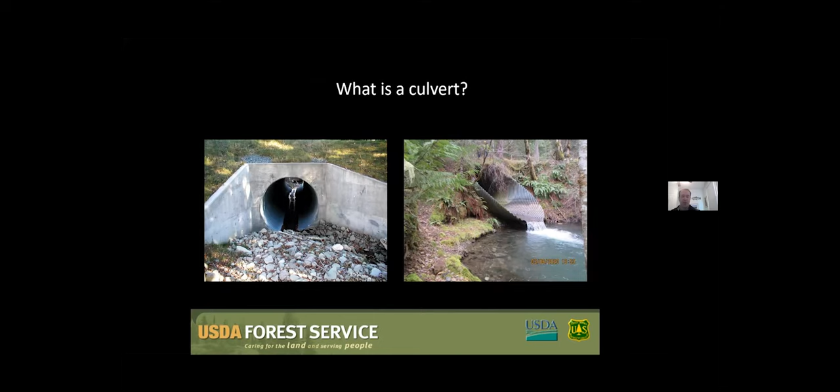So what is a culvert? It's a pipe. A culvert is a barrel or a conduit. It is a type of road crossing that transports water underneath the road.

Culverts come in all shapes and sizes. Road crossings and culverts can be small and inexpensive, or they can be large, very complicated and expensive. They can be rectangular, oval, or pretty much any shape.

But what's important to know about road crossings and culverts is that typically they use a hydraulic design. This means they are built to transport water through the road stream crossing. They are not designed for fish passage, and they're not designed to move sediment from upstream at various water levels.

We know that streams are dynamic, constantly moving sediment down from the mountains to the ocean. What you can see here is a culvert on the left with a hydraulic design; when it was installed, it provided fish passage. But because most hydraulic designs squeeze water through the pipe, the force of the water causes erosion, and over time they become fish barriers. So less than 20 years later, we have a very large fish passage barrier.

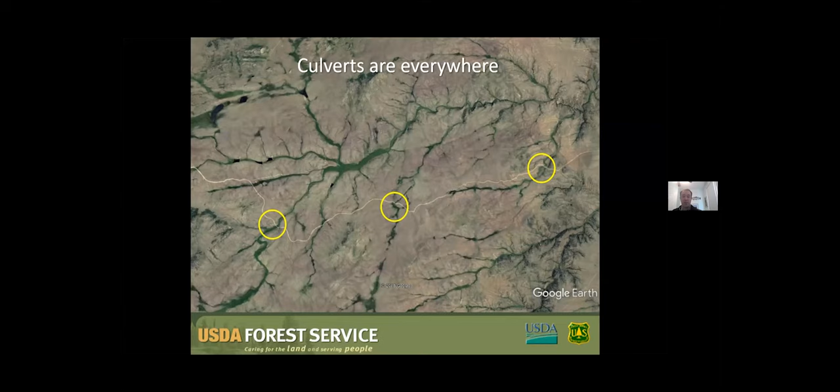Now we know these culverts are most likely fish passage barriers, just based on the thousands of culverts we've inventoried across the United States. We've found that between 50 and 90% of all hydraulic design culverts are barriers to fish. So these 3 streams here in this desert environment are most likely biologically disconnected from the main river.

Being so common, culverts have major ecological impacts. We know that fish need to access all kinds of different habitats for their life cycles. Here, the Chinook salmon makes spectacular migrations of hundreds of miles to find the cold water and clean gravel they need to spawn, to lay their eggs and die—but can find a culvert and be stopped in their tracks.

Fish are remarkable in what they can navigate. This eastern brook trout is fine in very shallow water; it can easily climb cascades and waterfalls. But when it comes to culverts, they often have very low water depth, and so a fish like the brook trout may not be able to move through a culvert because of the low water depths inside.

Pacific lamprey have trouble navigating high water velocity, and this is particularly a problem inside culverts where we have a smooth bottom. So these fish that have been migrating successfully for hundreds of millions of years now do not have access to most of their habitat because of dams, weirs, and culverts.

Most fish, like this incredibly colored Tennessee darter, do not jump. So when a culvert creates an artificial waterfall or perch, most fish are not able to move up through it. How can they complete their life cycle? In summary, culverts disconnect rivers and streams. They're either too shallow for fish to swim upstream, the velocities are too fast inside the culvert to navigate, or they create this artificial waterfall or perch. And remember, most fish can't jump.

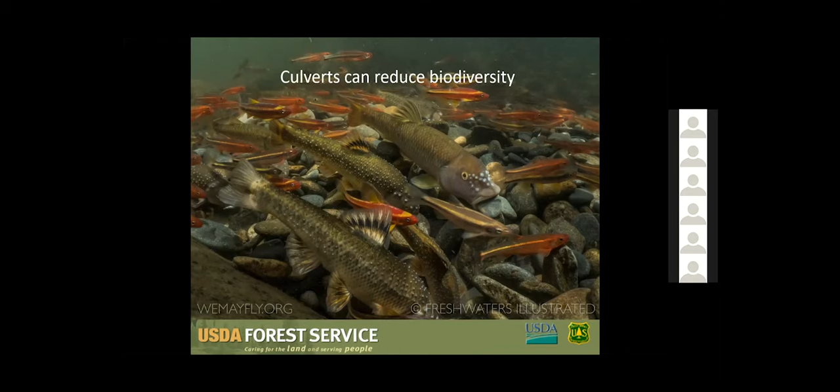The bottom line is that the cumulative impacts of culverts can greatly reduce aquatic biodiversity through fragmentation. Our research has shown that when culverts act as road dams and limit the upstream movement of aquatic organisms, these streams have lower aquatic biodiversity, lower genetic diversity, and smaller sized fish.

Of course, culverts impact more than fish. Here we have the largest salamander in North America, the hellbender, wrestling with a water snake. And culverts impact terrestrial animals as well that use these headwaters.

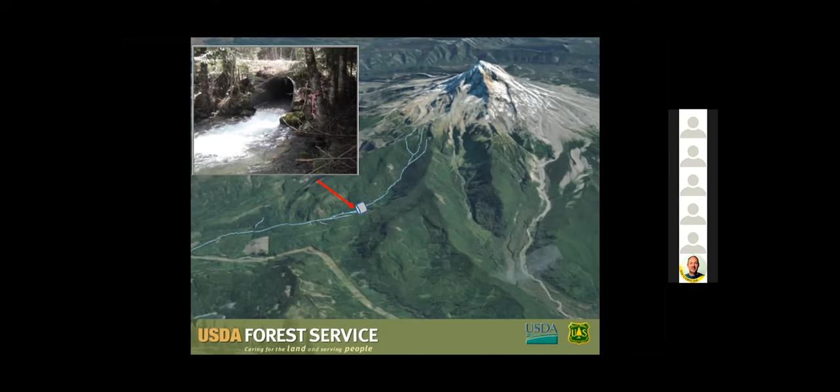Let's think about climate change for a moment. You can see the glacier of Mount Hood in Oregon and the stream flowing off that glacier. This is the picture of the culvert that was a barrier, which the Forest Service and partners replaced with a simple bridge and natural stream bottom. Now the salmon and steelhead can access this important habitat as waters warm and the climate changes.

But improperly designed culverts also impact us. They impact communities. When culverts are too small in their hydraulic design, they're often overwhelmed during large flood events, and the results can be catastrophic. When culverts fail, they create not only safety hazards, but they disconnect communities from where they need to go, sometimes for weeks and even months.

When we're talking about climate change, the culvert network that we have makes us increasingly vulnerable to its impacts. The research we've been working on with our colleagues shows a very strong link between fish passage and the ability of a culvert to withstand debris and heavy flood flows with climate change.

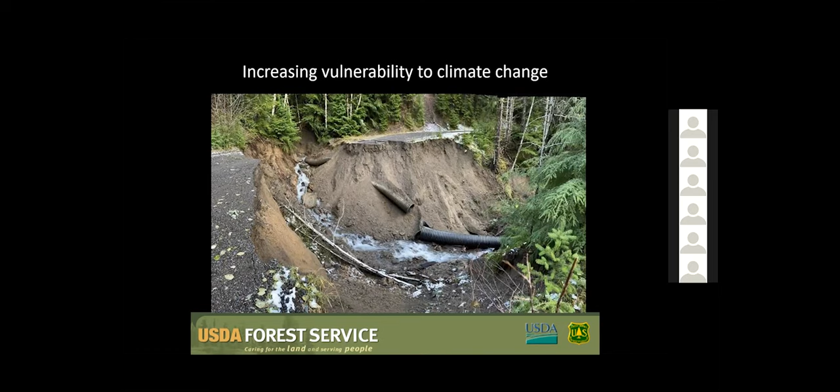But fortunately, we have solutions, and that's what you're going to hear about today. So that's the good news. We can find a place where we have fish passage. We can make the culverts and the road network safe for people and communities, and we can start to deal with the climate change that sits in front of us. I'll end here summarizing that you're going to learn about some concepts, methodologies, and strategies to deal with the problems of culverts, but luckily you'll see there's a brighter future ahead. Thank you.

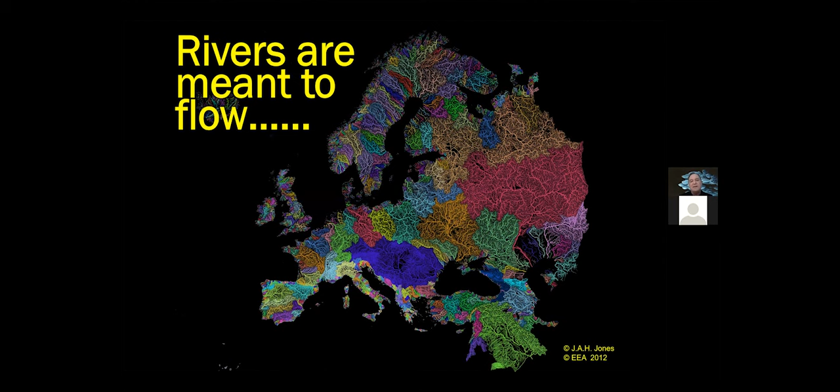We call them running waters. Unfortunately, in Europe, like in many places around the world, that's no longer the case. Most rivers nowadays just don't flow, at least they don't free flow. And of course, that is a problem because, as you know, they're some of the most endangered ecosystems on Earth, and ensuring continuity is key for their survival.

So you will be forgiven for thinking that it is the big dams which are the cause for this fragmentation, but that's not actually our biggest problem. It is certainly not the only problem, and in many cases, it's not the biggest one at all. The big problem we face in terms of fragmentation are what I would call the nasty six, and that reminds ourselves about the use we make of rivers.

We use rivers for generating electricity, but also for drinking, and we build dams to do that. We drain rivers when they are not convenient, to grow crops sometimes or to plant trees. We divert rivers so they can be used for irrigation. We tame rivers when they pose a flood hazard. We bury rivers when they stink and they are no longer nice, but we also cross rivers. And this is the one we are going to talk about now: the structures that we build in order to cross rivers, and those are fords and culverts. I'm going to concentrate on culverts.

Okay, so I think Nat has summarized very nicely what a culvert is, but let's just remind ourselves that of those nasty six, three are so-called ponding structures. Those are structures that are going to store water, okay? And those are weirs, sluice gates, and dams. The other three have nothing to do with storing water. We call them non-ponding barriers, and those include ramps and bed sills, but also culverts and fords.

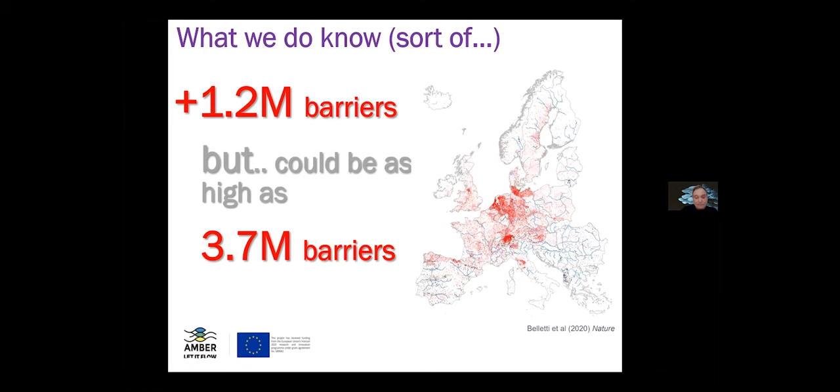So how many of these are culverts? Well, one thing we do know is that of all the structures that we have mapped, structures like culverts and fords and river road crossings are the ones that have the highest underreporting error. Those are the structures which are more likely to be missed in inventories, the ones for which our estimates are more of an underestimate. In the atlas that we built, that we compiled, we identified across the whole of Europe just over 111,000 culverts. But we know that's a big underestimate. It could be much higher than that.

So we know that because now, thanks to volunteers all over Europe and also increasingly in other parts of the world, they are starting to use our barrier tracker, an app that anybody can use to start recording and identifying these barriers. We know that volunteer citizens are telling us culverts are everywhere. They have recorded, as of data from a couple of days ago, just under 12,000 barriers, 16% of which are culverts. In some countries, like Denmark, people are telling us over 45% of the barriers they are discovering are culverts. In Norway, it's also over 40%, in Ireland, everywhere. Culverts are everywhere. Now, the problem with this, of course, is that this data is extremely useful, but it has not been collected systematically. We don't know how far or for how long volunteers were out there detecting barriers. So this data is very useful, but we need additional data in order to come up with more sensible estimates.

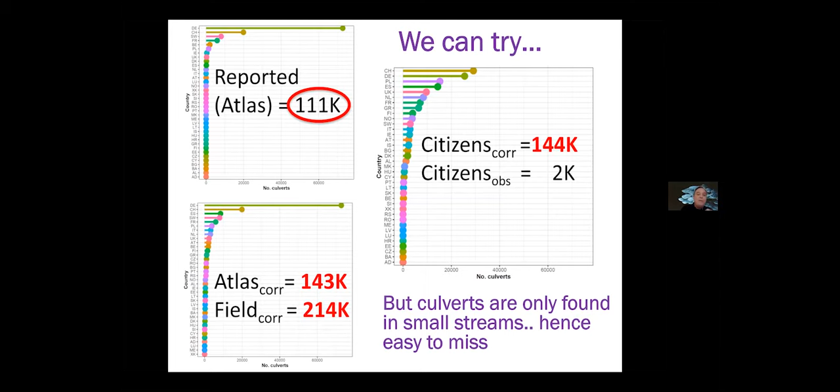But we have tried. And if you remember, in the atlas there were just over 111,000 culverts. When we apply these correction factors, we come up with estimates like 214,000 or 143,000, depending on which correction factors one applies. But of course, this is in a way based on something we know is wrong, based on the assumption that culverts are everywhere. But we know that's not the case. We know they're found mostly in the headwaters.

So what would happen if instead of using these estimates for the whole of Europe, we just concentrated on the headwaters? Well, the total length of the river network in Europe is about 5 million kilometers, 80% of which are first and second order streams. And if we were to use the density of culverts we found in the field, just in first and second order streams, one would come up with an estimate of more like 500,000 culverts. That's more than twice our previous estimate.

Okay, but obviously this is a very rough estimate. Perhaps another way we can tackle this question is by looking at other ways of estimating culvert density. One way that my colleague Barbara, during the AMBER project, did was to look at the density of river crossings. And we found that that was a reasonably good predictor of barrier density.

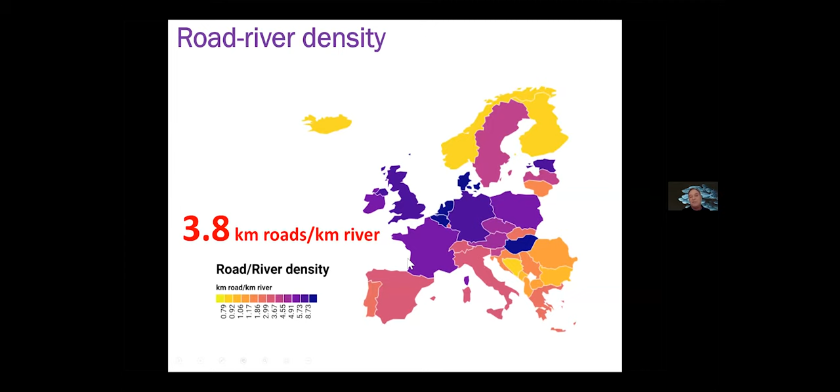Now, Europe has some of the highest densities of roads anywhere in the world. And you may be surprised to discover that for every kilometer of river, there is almost 4 kilometers of roads in Europe. Some places where the rivers are absolutely crisscrossed with roads are Germany, the Netherlands, the UK, and France. Some of these are very, very high estimates.

So if we were to use this method instead of the field method I outlined before, one could reasonably come up with an estimate which is under 1 million culverts. Obviously, this is a very rough estimate. It would imply that places like France may have over 150,000 culverts, Spain 100,000, Sweden 86,000, and so on. So it's a big, big number. Obviously, the uncertainty is high.

Is this a reasonable number? Well, my colleague Steph, who will speak next, has estimated that for Great Britain there may be about 50,000 culverts. We have just estimated that number may actually be 59,000. In the Great Lakes, which is about 20 times smaller than Europe, there are reported to be 250,000 culverts. So it may not be that unreasonable to find this sort of hundreds of thousands number for Europe. Germany has 51,000 bridges, so perhaps 96,000 culverts is not that unreasonable.

And the same for France. France has, nobody knows for sure, but it has between 200,000 and 250,000 bridges, so perhaps 150,000 culverts might also be reasonable. It doesn't really matter what the actual number is, and it will take a lot of work and research to get more precise estimates. But what is clear is that culverts are very numerous.

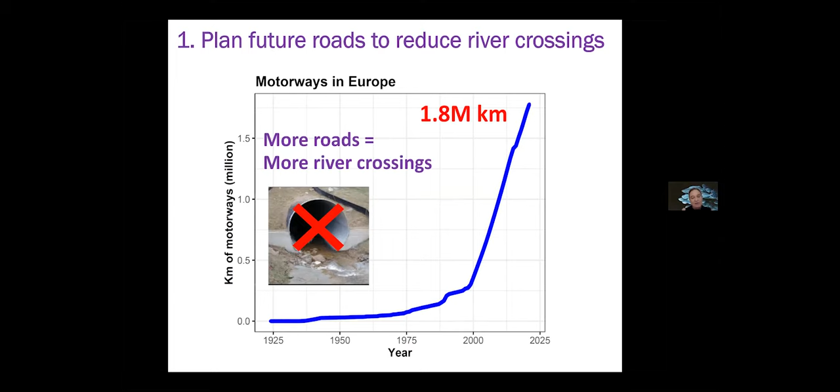We now have almost 2 million kilometers - this is just motorways. And of course, more motorways probably mean more roads, which means more river crossings. So we're never going to win if we continue crisscrossing rivers. The way we can win, that we can reconnect our rivers, is by halting, stopping, fragmenting them, and that perhaps can be done by rethinking how we plan and design roads.

Likewise, the other thing we can do is perhaps start considering how we can decommission abandoned forest tracks, roads which are no longer in use, and how we can apply some sensible rerouting of existing road networks in order to minimize the number of crossings.

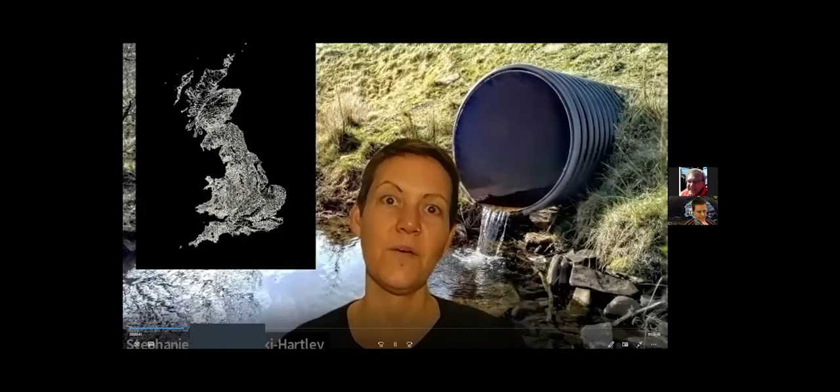Firstly, I use the satellite imagery and the existing spatial data, which are streamlines and the locations of road river crossings we don't know the types for. I then zoom in and along a streamline until I find a road crossing mapped by a yellow pin. Once at the pin, I zoom in as far as I can and visually assess the structures at the location. It is most often a culvert, a bridge, or a ford. Once I identify these structures, I map the corresponding marker, and that's it. I will then continue along the streamline to the next river road crossing.

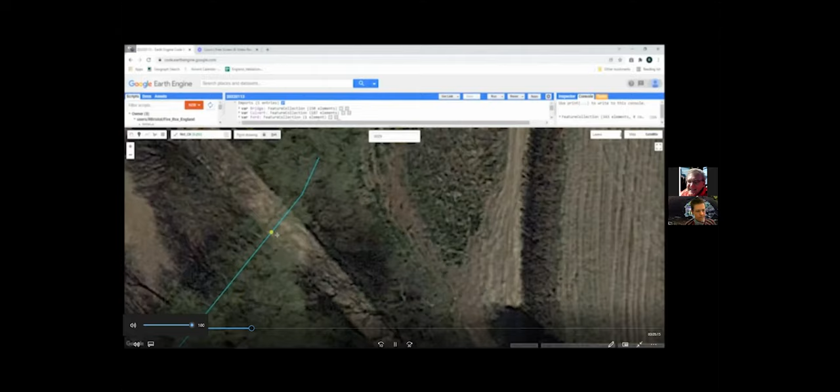Sometimes the imagery is low resolution, or there are trees covering the structures like this one here. In such cases, I use the corresponding marker and map the location as not clear. A second person later visually assesses the location, and we aim to map all structures as a culvert, a bridge, or a ford, not leaving any not-clear points. Eventually, the satellite imagery is full of coloured pins, and we have attributed the road river crossings. This data will be part of a large river obstacles database for the United Kingdom.

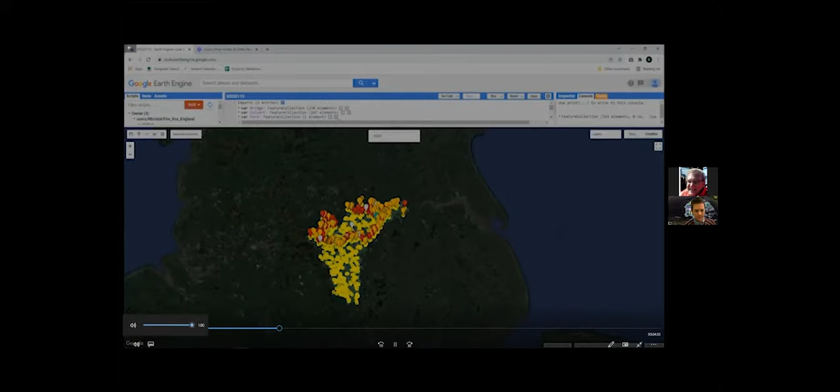Thanks, Rochelle. To date, we've attributed nearly 12,000 road river crossings in Welsh catchments, finding that most are culverts, and you can see those as orange dots on the map.

Culverts on small streams are vulnerable to failure because they're often situated outside built-up areas and in steeper terrain, and the status quo is that these culverts are poorly installed and maintained. But what do these culverts look like in Wales, and what attributes might indicate these structures are impacting nature and possibly people? Well, we're in luck, because today our culvert correspondent Carrie is streamside and ready to get her feet wet.

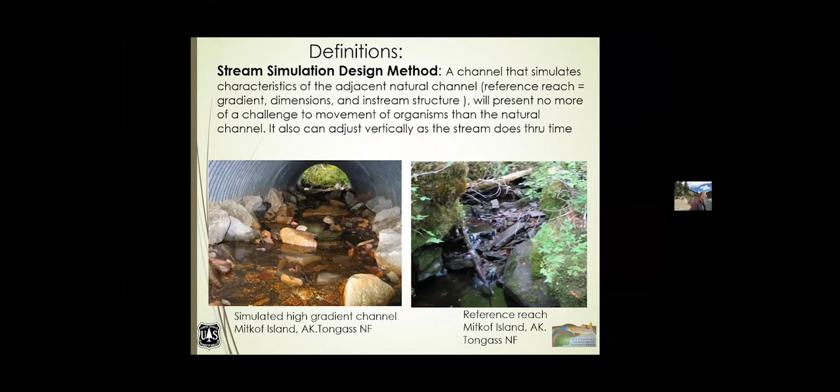The reference reach, that's the principal thing that we're going to be copying. A reference reach can be found in every stream type and geomorphic context. The reference reaches are found either upstream or downstream of the structure, and they provide the channel dimensions, the material sizes, the grade controls, channel units, etc., that are used to configure the channel as a crossing with similar attributes. It is the stream segment that is copied and emulated to develop our design.

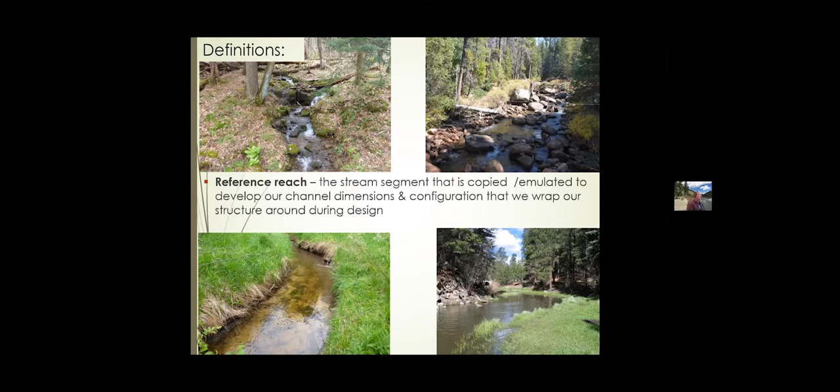So bankfull width, that is a significant width as far as hydrology goes, and it's the width of the location where the channel begins to spill onto the floodplain.

Oops, is that just me or did we lose Bob? I think we lost Bob. Yeah, he was too enthusiastic. We have to find Bob again. Maybe while he gets back in, we can move to the next point. What do you think, Herman? Shall we give him 2 minutes, 1 minute?

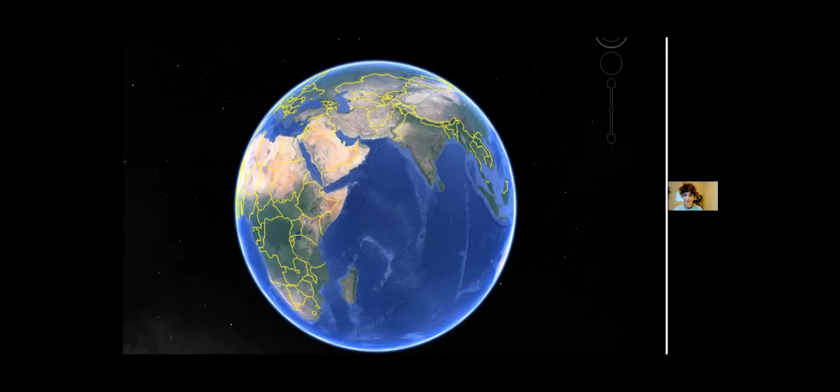Can you turn your camera on so I can spotlight you? Yeah, I think I have. This is Luke, I don't know if you can hear me. I can hear you, just 20 seconds. I'm going to show where you are, Luke. Here we go. Okay, let's see where he is. Oh here we go, all the way to the UK, West Cumbria, here we are.

Hi Luke, how are you doing? Where are you? I'm good, thank you. Hello everybody, thank you for joining us out here in West Cumbria. What are you doing there, where are you standing? Well, behind me you can see the fringes of the Lake District National Park, and we're very close to the Irish Sea, where the rivers of the Lake District flow out into the sea. What we're stood on now is a fairly flat, traditionally maintained field that has had almost 1,000 metres of culvert installed right underneath where I'm stood, to enable field drainage and surface water to get out underneath the field so they can farm on it.

Okay, what kind of culvert is it? Is it like a kilometre long and closed off? Well, I'm just going to walk over to the best area to show you, and you'll be able to see that it's a pipe underground, about 500 millimetres, and fairly consistent. The problem is, obviously, the kilometre of river around 100 years ago was completely buried and hidden away so that it wouldn't aggravate the farming.

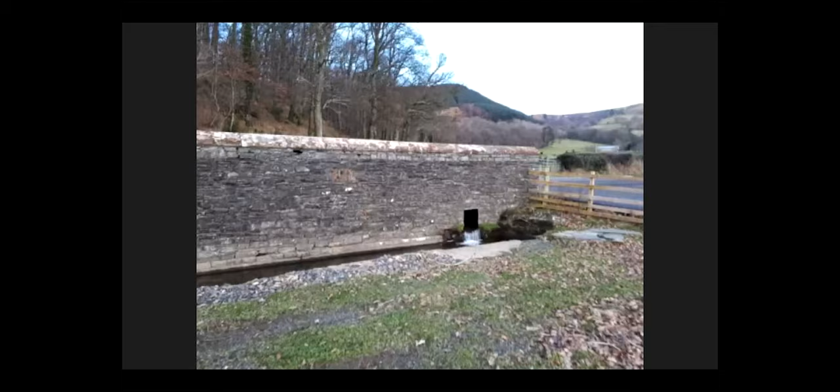I've got a couple of pictures to show, which is just where I'm walking to now, and I can quickly talk about some of the other benefits of this project. You'll see the gravel pile - this is what's been taken out of this trough here. If I speak up over the water, you can see where it crosses underneath this main road - there's a lot of cars here. That's the main culvert underneath the road, and then it disappears underneath this grid system here, flowing down into the distance.

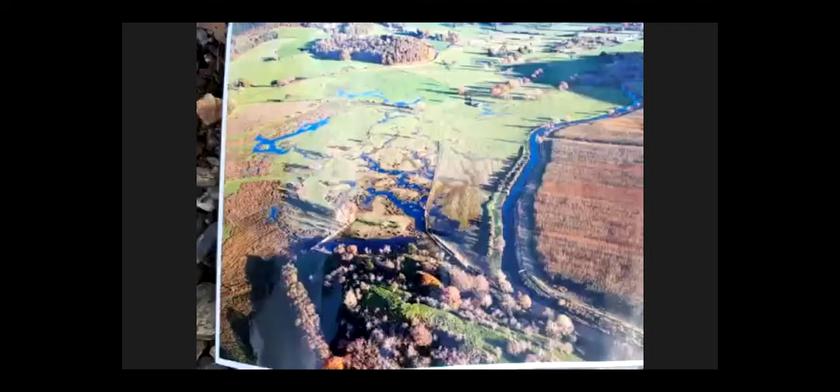So we will create from here a really nice new channel, a new habitat. But crucially - this is very basic of me, I apologize - I can show you a picture here. These are some of the wetlands further down that we're going to be connecting into the main river. On the right-hand side you can see the River Cocker, which is a really important salmon fishery for us, and you can see that mosaic of wetland. We'll be connecting into there so that those field systems allow the water to get out, and that will help farming, but it will also help the habitat here.

And this is just looking at the scale of the project. I'm stood - where am I? - about half a kilometre behind here, and the new channel will be running, follow my finger, into these wetlands and connecting up to the Cocker there.

This is a great explanation of what you're going to do, and I think it's inspiring to see that you are opening up a culvert of 1 kilometer. Yes. So do you have a last question before we finish?

Yes, and in the chat there is a question from Francisco Martinez. Can you tell us the municipality where this is taking place? Are you near the coast? Well, as the crow flies, we're about 7 or 8 kilometers from the coast.

How do I explain it? In front of me now is the coastline, and behind me in the mountains there, that's part of the Lake District National Park. So this channel here will directly feed into the Cocker, and then the River Cocker will flow out, as I say, about 7 or 8 kilometers into the coast. So it's one of the first options for migrating salmon to find sheltered backwaters for spawning.

And I see another question.

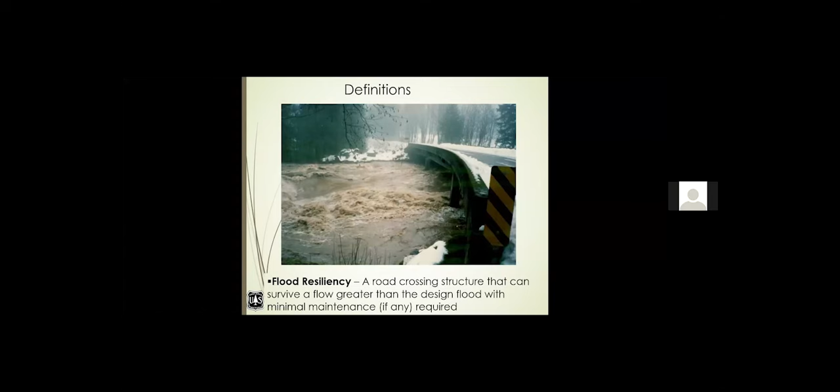I'm going to go through what I've already done and get to the next slide. So we're at flood resiliency, a structure that's able to survive a flood greater than what it was designed for. In the US, and essentially in the world, we've had an evolution of design methodologies for aquatic organism passage. At first we had hardly any consideration for AOP, then we moved into using bare pipes and backwatering them for passage, then we started adding appurtenances such as weirs and baffles using the hydraulic design method.

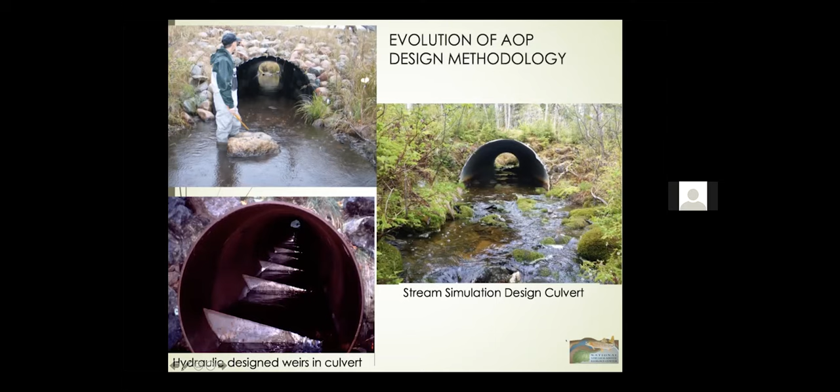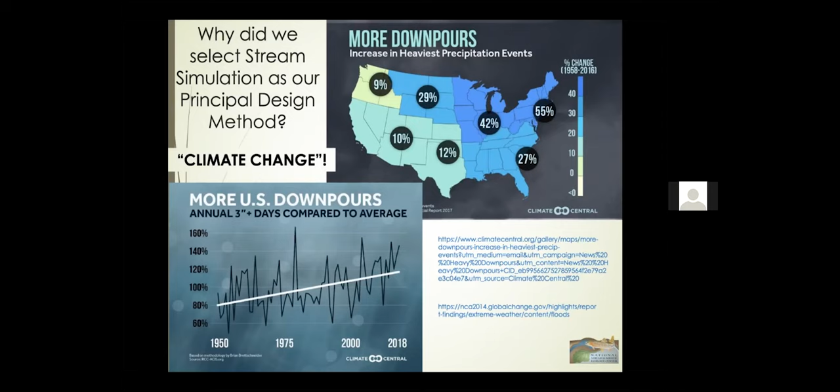Next slide. So where it comes home from a stream simulation standpoint for us is that we're getting these huge floods, more frequent floods, and they're hammering our structures.

Next slide. So what does that mean? That means when you use stream simulation, you may have a higher upfront cost, but in the long term, what Nat and the rest of the team found is that typically we're only 9 to 22% more in the upfront costs, but the research shows the long-term costs are cheaper. So you pay a little more money upfront, but in the long term it's much cheaper for us, and our infrastructure essentially is being flood-proofed by our stream simulation design methodology.

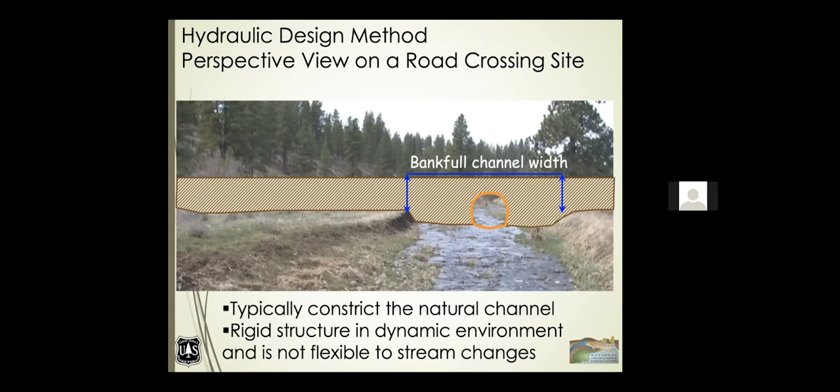Next slide. So as we go into stream simulation, the natural channel, there's no constriction within the bankfull limits. We are passing water also on the floodplain if there's a high conveyance, so the fish don't see any difference really from the structure to the stream itself. It's also a flexible design, meaning that as the bed changes—if you recall some of the photos Nat had in his presentation showing bed elevation changing at the outlet—in this case, if that bed went down, it would not become a perched barrier like you saw on the bare pipes.

Next slide please. So I'm just going to go over phase 2 and phase 3, the site assessment and stream simulation design. We go through a lot of these, but due to limited time, we'll just talk about those two. The initial assessment is the large scale view. We're looking for whether we see any geohazards there, and can we move forward with stream simulation design.

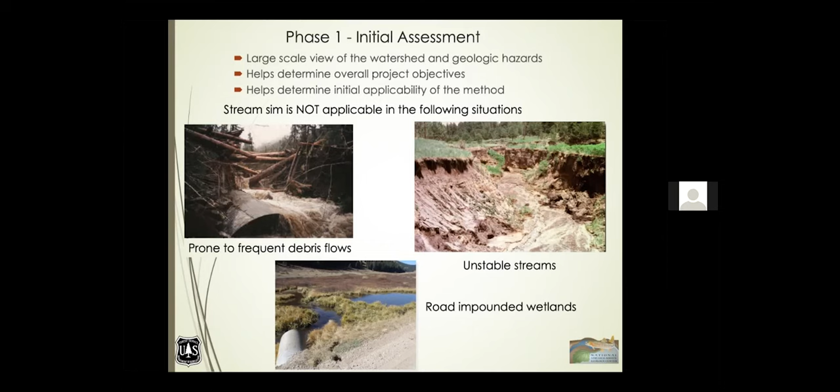Next slide please. Then we go into the site assessment. Our main purpose for that is trying to understand the stream. We are trying to find a reference reach to copy all the different metrics that we need: the channel width, the bed width, the sediment sizes, etc. So we'll go into some of the parts of that.

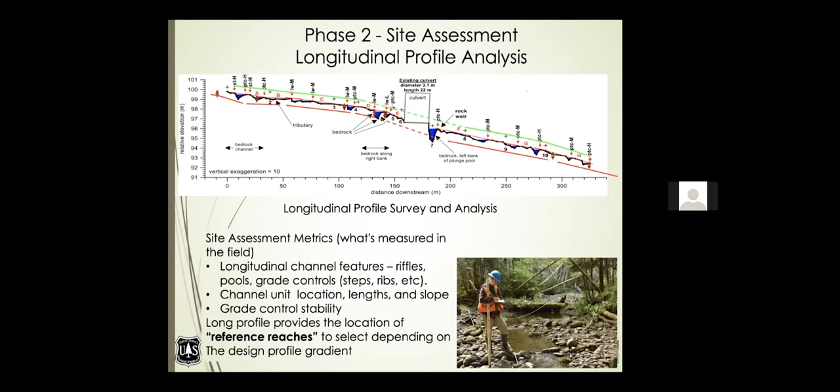Next slide please. So the first thing we do is go into a stream and do a long profile survey and a long profile analysis. That segments the stream reach into different channel gradients based on grade controls upstream and downstream. One of those segments is going to be our reference reach, and we measure the heck out of the stream in those reference conditions to come up with those metrics.

Next slide please. Then we go into measuring the cross sections. The cross section essentially is going to define our bed width, which is the bankfull plus our banks or margins, the shape of the channel, and our cross-sectional area. We're going to bring those for the different channel units into our design itself.

When we're doing this, we're going to take a complicated cross-section or set of cross-sections and turn them into something more simplistic from a constructability standpoint.

We review and measure the channel bed materials. In the analysis of those, we measure the particle sizes and distribution of the surface particles in the stream bed.

We do a visual estimate of our subsurface materials to determine a rough percentage of sand, because it's meaningful in our development of our gradation.

We measure the key pieces, grade controls, things like steps, boulder clusters, wood that protrudes into the dimensions for channel roughness.

We get the cubic dimensions, the sizes, the spatial distribution, the protrusions of those, because what we're doing is copying this reference section and using that as our design template within our structure.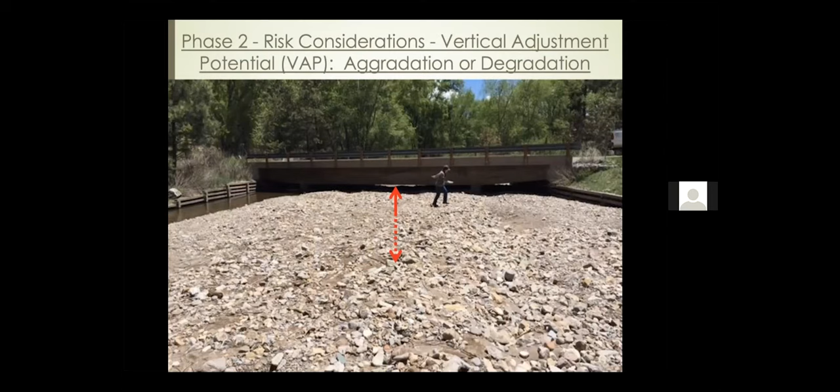Then we look at the vertical adjustment potential, which is the fluctuation in the bed up and down in the stream. Typically, when we have small orifices at our structure of the existing structure...

...there is typically a sediment wedge upstream, and we need to determine what's going to happen to all that material in the design. So understanding where deposition may occur going downstream, understanding how far...

...up a head cut might go. Again, these are all needs that need to be addressed during design.

Next is the risk of head cut. Trying to understand in a stream, if a head cut is initiated, how far up will it go and what are the ramifications of those?

So here we see in a photo, this photo is down in Mississippi, and the downstream section has undergone incision because the entire Mississippi basin is lowering stream channel-wise because of things that we have done for navigation and...

...flood control in the Mississippi River, and it's propagating up through the system. So in this case, we have a downstream that is one elevation and an upstream which is a higher elevation. You can see that the upstream channel is protected.

During our design, we may make a decision either to allow the incision to go up, or to restore some of the downstream reach so we have a usable gradient. Again, you need to understand what the ramifications are for head cut.

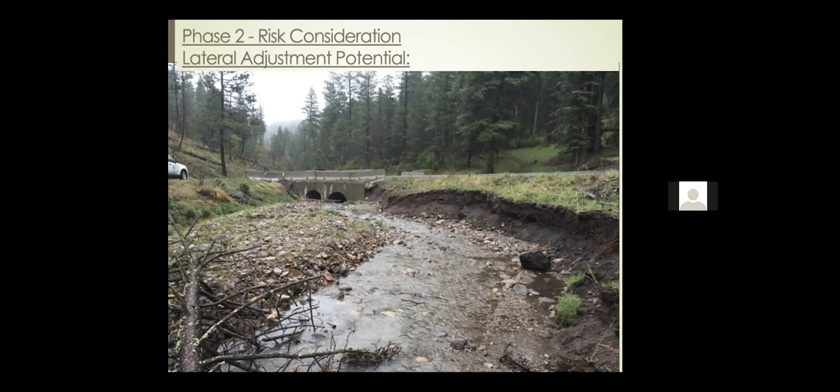Last one is floodplain conveyance. Depending upon where you are in the watershed and how much water is conveyed, you need to understand that, because as you see in the photo, when the water came up, before it blew out this pipe, it was blowing over the road in a number of different locations.

Typically, those are either low spots or they're flood swales or historic channels. When you are conveying a lot of water across a floodplain, you need to pass the majority of that water on the floodplain, or you need to have a very, very large structure...

...because think about the changes in the shear stress on the bed. If you're focusing all of that water from the floodplain into the structure, your depth is going to be higher in the structure versus upstream in a different portion of the channel, because there's greater depth of water...

...because you're funneling all that water through one structure instead of using the conveyance of the floodplain and those lateral channels and swales.

So then we go into the design. We know the channel, we have a bunch of reference conditions. We're going to design a profile that ties in two grade controls, a stable one upstream, a stable one downstream, and the gradient of that profile should be within 25% of one of those stream segments that we'll use for a reference condition. So if you have a slope of 1%, then your reference conditions can range anywhere from 0.75 to 1.25% slope. From here, you're able to pick that segment we'll use for our reference reach.

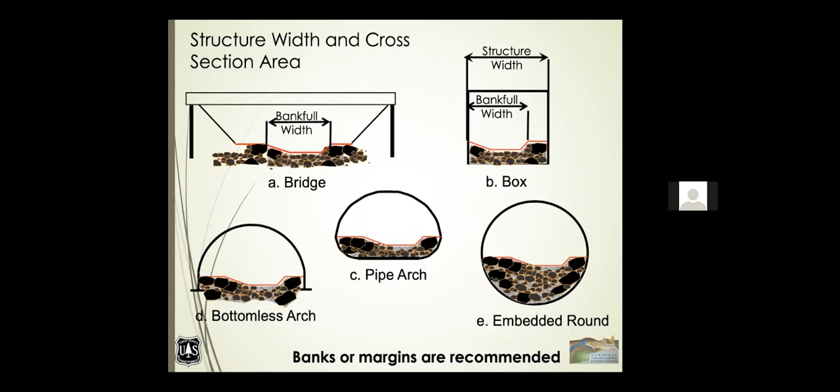Just quickly, some culvert anatomy. You have the culvert height, then you have your depth of water there. If you divide your water depth by your culvert height, you come up with a metric, and that's the headwater to depth ratio.

Our requirements for stream simulation are that we want to have at least 20% of the vertical open space available for debris and hydrologic uncertainty. One of the things we realized when we went into stream simulation design is that when our structures went to bank full or greater, our headwater to depth ratio went down to about 0.6 to 0.7, leaving about 30% of the rise available for debris. That's one of the principal functions of why we're seeing much greater survival during floods greater than a Q100 design flow when it goes through a stream simulation culvert.

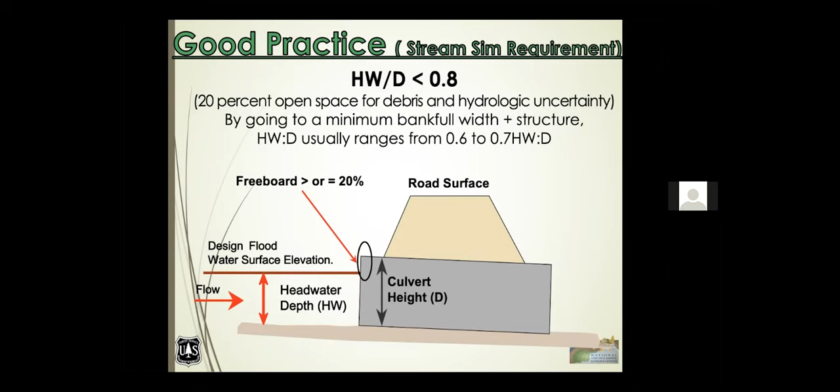What we definitely don't want to do is have the water go over top of the culvert. That puts it in a pressurized flow situation, and that's the best way to lose your bed material and fail a stream simulation culvert, is to put it into pressurized flow.

We need to know where the embedment is and get it down below. Again, that's vertical adjustment potential. We use the stream and the pool depths to do that and apply a fudge factor.

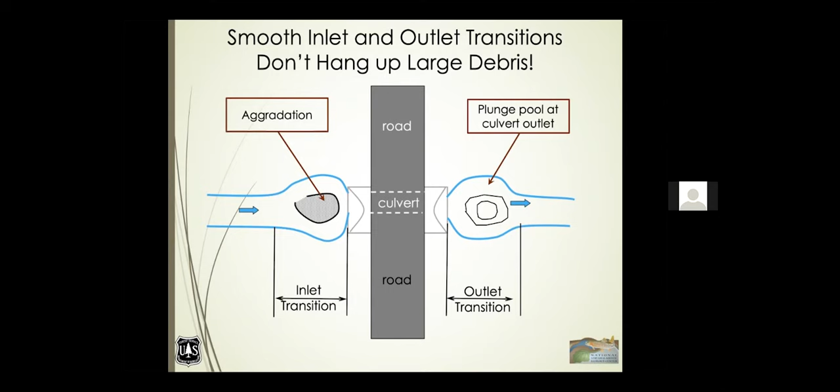Smooth transitions in and out of the culvert. You want to have that smooth transition going out because we know that rapidly changing cross sections are places where you either hang up debris or you start aggradation.

And then our bed configurations. Again, we're using the same size materials in similar configurations within the structure itself. We're using the lengths and ranges of the pools, riffles, depths, etc., from our reference condition and fitting that within the two stable grade controls.

Stream simulation, again, is about equal mobility and stability of materials. You want to have the conveyor belt that the stream uses to move those sediments at the same flows. If your structure is starting to pass sediment faster than your reference condition, you're in a degradational mode, and vice versa, you could be in an aggradational mode, which is why we're using similar dimensions from our reference reach in our structure.

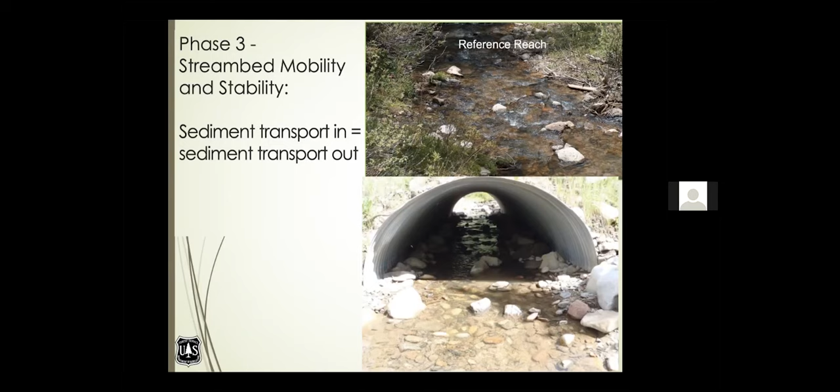The configurations are different in different parts of the watershed. In the upper portion, we have incised confined channels, where structure width is the valley wall width. As we go down, we're getting more water onto the floodplain. In the median section, typically we still have one structure, but it's larger because we're taking in some flow from the floodplain. In the lower portion, we have multiple lateral structures because we simply can't fit all the water through the main channel, and we need side channels and swales to pass flow and keep the shear within the structure similar to the bed itself.

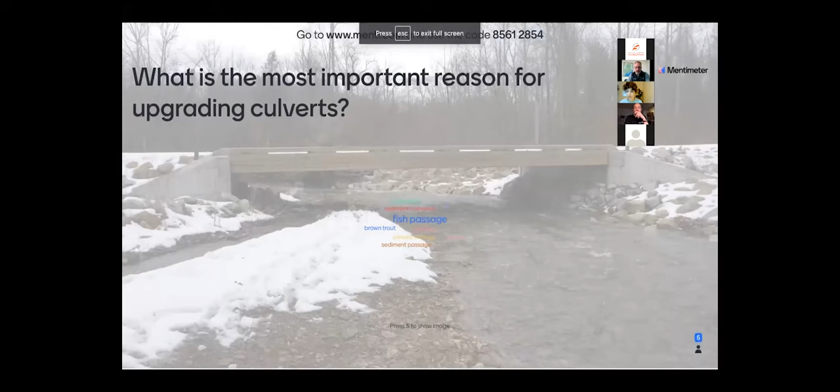Everybody's starting to fill in answers. Let me see—reducing fish passage barriers. Fish and climate change is an important reason. Fish passage, everybody's really active.

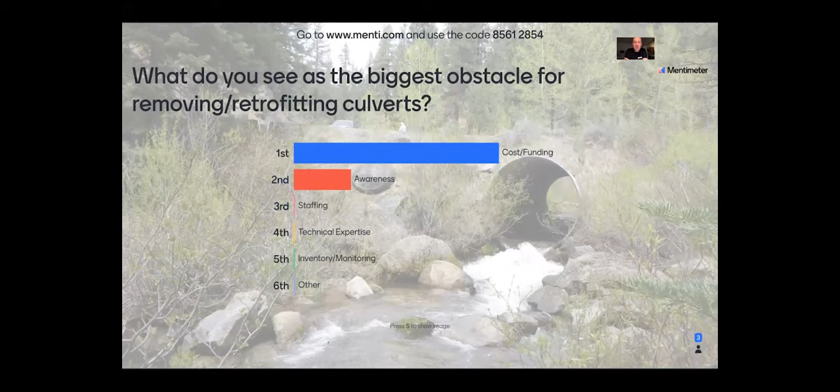What do you see as the biggest obstacle for removing or retrofitting culverts? You have to start with the first one, which you think is the highest, then go to the second highest, the third highest, which you think is most important. Four people have started filling it in—now they're coming in. If you chose other, put your reason in the chat. A lot of people think cost and funding is the biggest obstacle, but awareness also has a high score.

140 answers by now. Wow, this really works well, Nicole. So if you don't know, if you have something else that you think is important, then you can put it in the chat.

I think we all agree that cost and funding is the biggest obstacle, but awareness and technical expertise is the third one. Anybody else want to say something about this?

Yurena, are you not able to see it, or are you able to see it? Yurena needs to be promoted to a speaker again before she can speak. Nicole, would you be so kind? Yeah, let me do that.

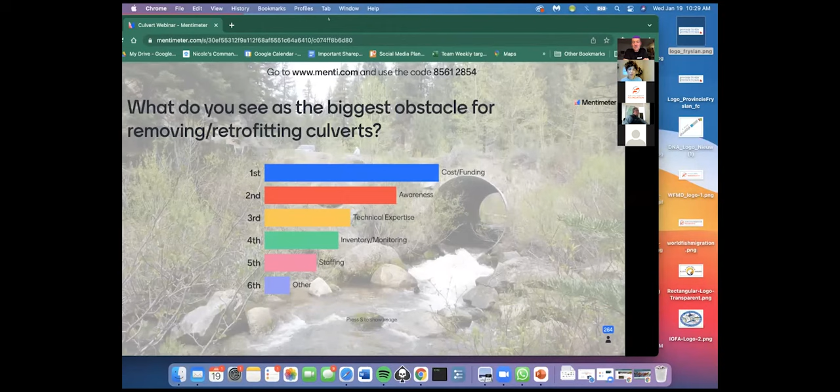Now I'm here. My Zoom just crashed. That was it, and I was not able to speak. But I'm sure that you did it very, very well. And now I can see the Mentimeter and everything.

A lot of people filled in answers, over 260 answers. So that's really great. This gives a good overview of what people think is the biggest obstacle. We're going to come back to this in the discussion.

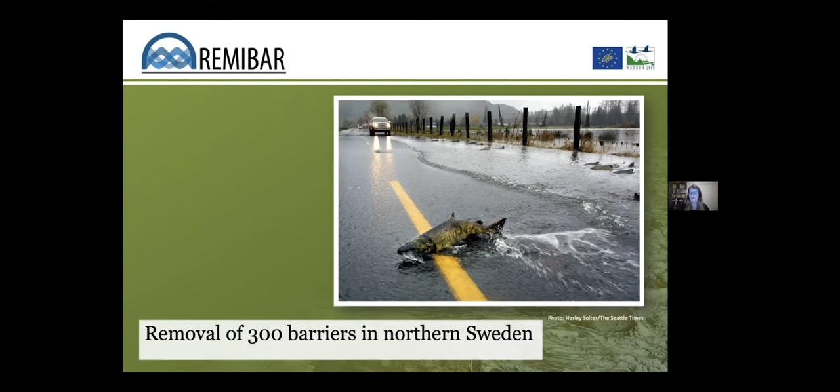So let me tell you a little bit about my part of the world. I live in the northern part of Sweden. We have a fantastic and wild nature, with many lakes and rivers that do not have hydropower dams. Many of them are protected by EU and the Natura 2000 sites. Natura 2000 is a network of protected areas covering Europe's most valuable and threatened species and habitats. The northern part of Sweden is a core area for many endangered species, for example otter, brown trout, salmon, and freshwater pearl mussel. Next slide, please.

The connection of streams and systems allows for the natural processes that have always occurred, and that we disturb with barriers, to occur again. So I have now showed you four—no, go back one.

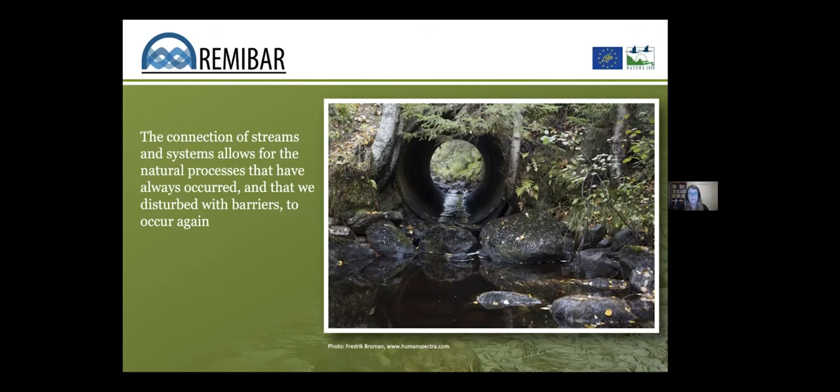There are approximately 20,000 culverts and bridges, and probably many more, in the water district of the Bothnian Bay. Many are on public roads, but more than half are on forestry roads, roads built for forestry activity. We have seen that about 30% of all the stream road crossings are migration barriers.

This project has been a collaboration between the Swedish Transport Administration, the county administrative boards of Norrbotten and Västerbotten, the Swedish Forest Agency, and the forestry companies Sveaskog, Holmenskog, and SCA. The Swedish Agency for Marine and Water Management was also a partner.

So as we all know, this is the problem. And this can be the solution. If we build an arch or a bridge instead, with a natural stream bottom inside the passage, the water velocity remains the same and there will be no fall at the outlet. Now we will try to show a short video.

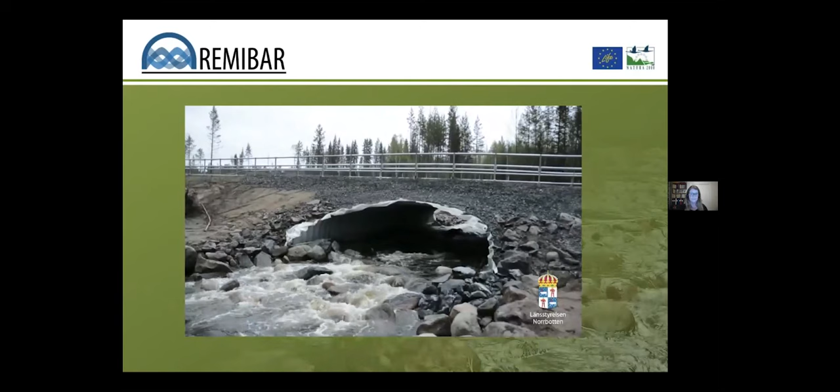Okay, thank you. So this is what it looks like before and after.

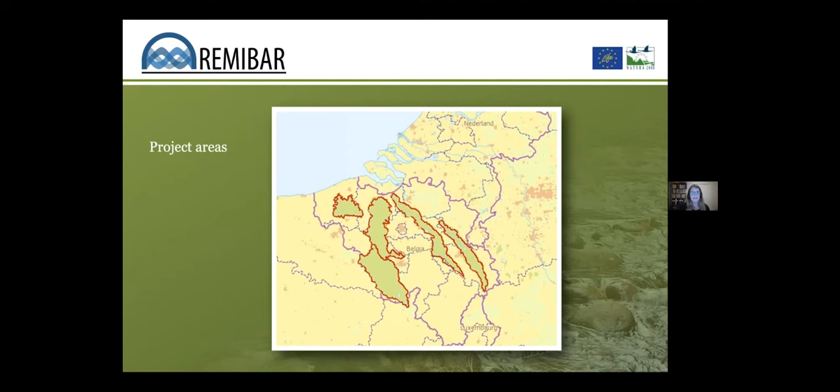We have worked in 4 big catchment areas in Sweden, and all of them are Natura 2000 sites. If you put those areas over Belgium, you can see how big they are. So this is the areas that we have worked in.

As part of the Remibar project, we have actively been spreading information. We created a website, and spread information via Facebook and YouTube. We reached out to different groups of stakeholders, schools, and the general public by organizing excursions and seminars. Our most popular dissemination activities were the school excursions and family days.

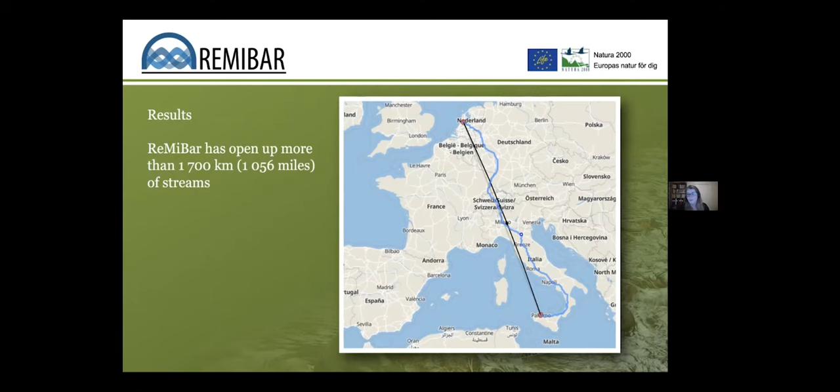It is a cost-efficient approach to cooperate with government, forestry companies, and private landowners. Together, we managed to open up more than 1,700 kilometers of rivers and creeks, that is over 1,000 miles. For example, it's the distance between Amsterdam and Palermo. The best lesson learned is that we have to cooperate.

So are we done with our work? Herman, please, the film.

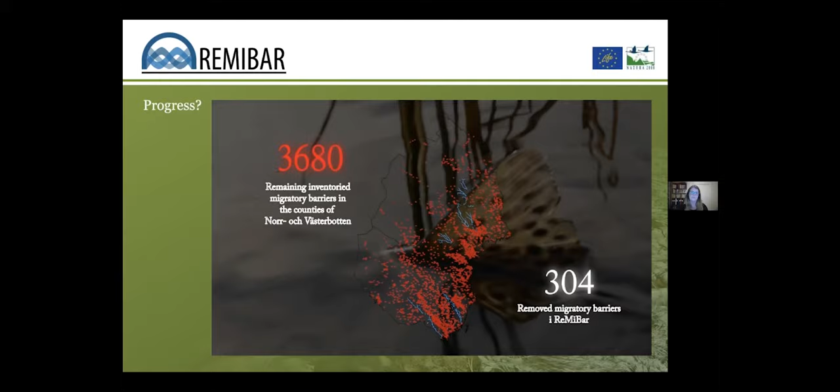We have done some evaluation of the project, using data collected in existing environmental monitoring programs, including electrofishing and fish counters. At the end of the project, we already saw positive and apparent trends in the data from some electrofishing sites regarding reproduction of Atlantic salmon and brown trout. Once remediation efforts have been carried out, it generally takes a long time before it's possible to record any effects on the population.

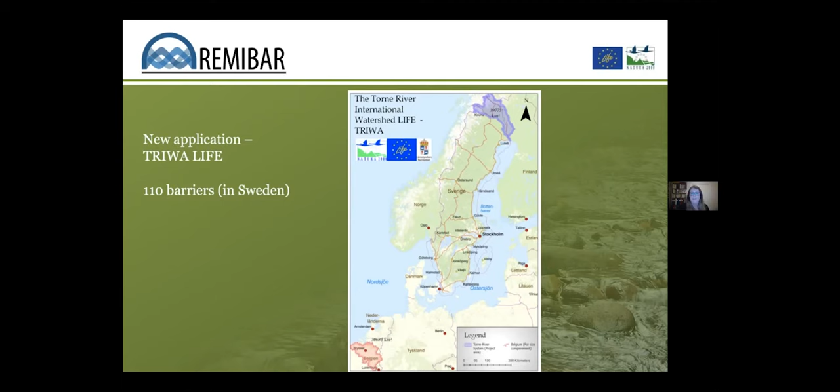Well, thanks to you, Sophia. This was a very, very good presentation, and it's great to listen and see all the things that you are doing in Sweden, and also to realize that you are planning to continue, that there is a continuation of sustainability, not just doing this and stopping there. I see that there have been a lot of positive reactions in the chat. They loved the videos, so thank you so much and congratulations.

One question for Sophia from the chat, I think it's an important one. Why was it easier to work with multiple agencies over in Sweden? How was it possible that it's so easy to work together in Sweden? Why isn't it easy to work together elsewhere? That's my counter question. We have a long experience working together, and it's not really a problem. Maybe in other places it's not that easy. We have worked together for a really long time, and also the staff change jobs between the different agencies, so it might be easier for us to work together since we've worked at the same agency before.

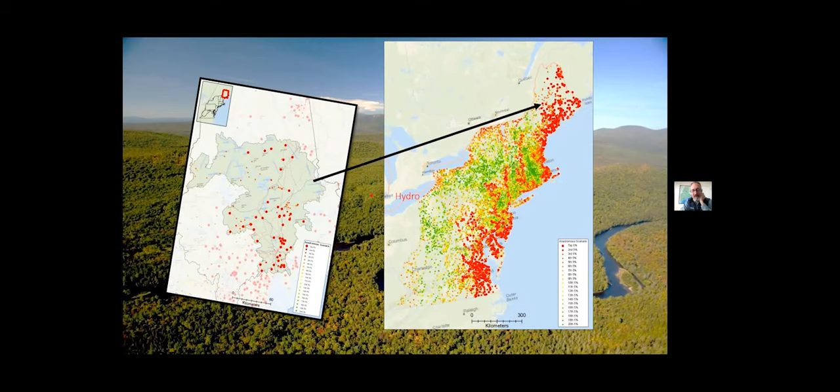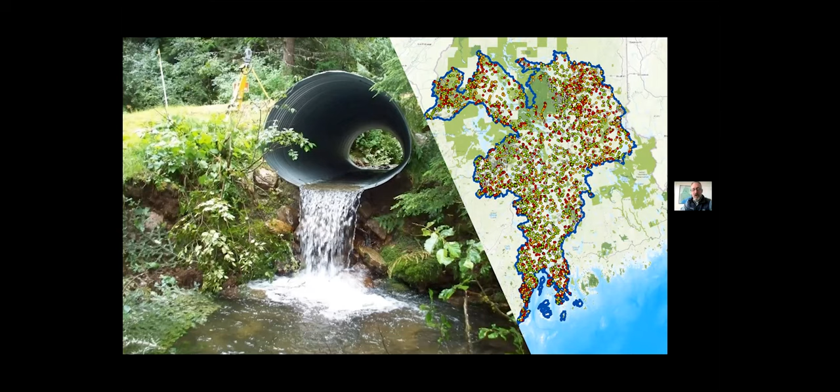But it's sort of missing an important part, which is of course that there are all these little freckles, these measles all over the map. Once we realized it was such a problem in this watershed, these culverts, we realized we needed systems to improve the way we look at road crossings, the way we improve them and replace them and build new ones.

So as we looked at the problem and talked with partners and networked among people who've been looking at this for many, many years, we realized we need both leverage and this flywheel approach. We need to find specific buttons that need to be changed so that we can affect culvert management around the state. It's not just a watershed approach, it's something we need to do at the very high levels of the state, as well as federal laws around permitting. But we also need this momentum.

So how do we do that? I think we have a multifaceted approach, much like Sophia's, and something that Luke was talking about in West Cumbria and Steph was talking about in Wales. We need to know where the habitat is. We need to know where the barriers are. We need to analyze these data so that we can focus work, because if you just do lots of little projects scattered all over the place, maybe you'll get there someday. But in the case of Maine and many places, we don't have a lot of time. And with the changing climate and more severe storms, we need to replace the best places sooner, open up the habitat and allow our aquatic life to thrive in the communities around those habitats.

We need funding mechanisms, policies, outreach, education, implementation. I'll go through these steps through my presentation.

But it started with collecting the data, which was done by volunteers at first. And then we realized this was really the most efficient way, is to train a whole crew at once. It's about 60,000 to 70,000 euros a summer to get them out going. It took them 13 years. It probably would take more like 10 years if we had started with this method.

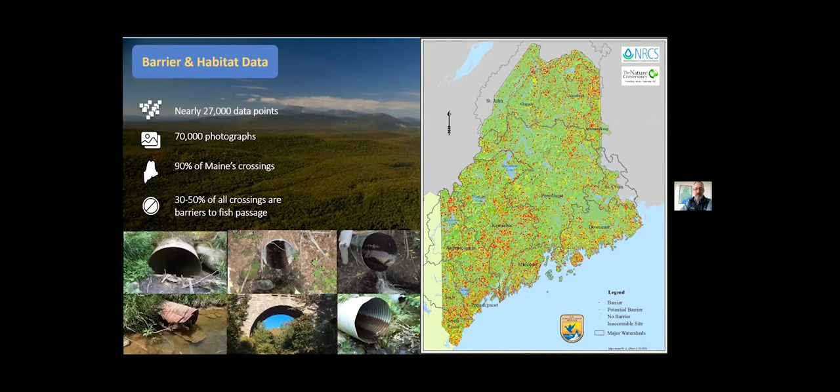So we've covered 90%. There's some parts the crew couldn't get to, these last little bits where the road had disappeared or there were gates. But we did find that about half of these are impassable to fish. And this is the breakdown of the entire state.

We also look at other species like our sea run fish. They need to connect to the ocean. So we need to make sure we have connections from the ocean all the way to the headwaters. It's the headwaters that have the most habitat. Something like 80% of the habitat are in headwaters that could be bisected, fragmented by dams. Not all the species go to the headwaters, but there are other species that live exclusively in the headwaters. And it's not just, of course, for these species, but the people that enjoy these areas and for the road systems and for the culture around these areas.

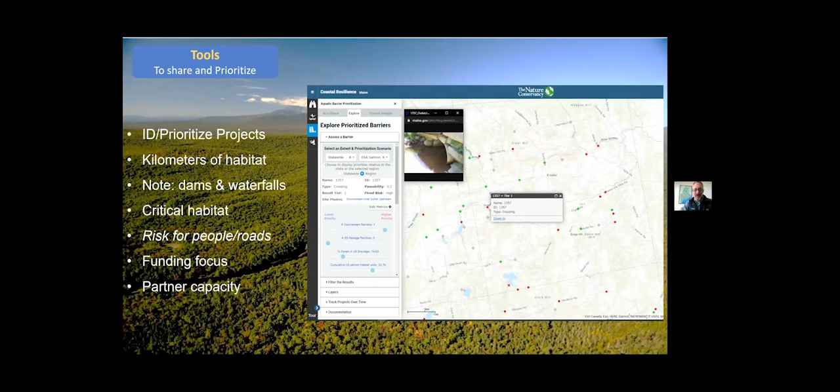As we look at these culverts and funding mechanisms, we realize it's not all one source of funding. We need multiple sources of funding. For towns, we would need a different source than for state roads, which hopefully can take care of their own network. These sources come from several US government agencies, and luckily there is cooperation among them.

There are opportunities to match funding with certain funding sources. Sometimes private funds come into these too. But we're also getting in-kind match from these agencies as they help with the other components of education and outreach.

We also needed new policies, because we realized it was harder to fix a culvert and get permitted to do that, to have that predictability that you'd have a successful project by the time the money came in and everything lined up. We needed policies that made it easier to fix these culverts, with streamlined culvert permitting rules, making sure we're still safe with the stream, but that it can happen much more quickly.

In the long run, a healthy, stream-simulated designed crossing will adjust and adapt. Streams are used to adapting, they're used to disturbances, but they're not used to permanent disturbances. So by having these policies in place from the federal level to the state and even local levels, we can produce better crossings.

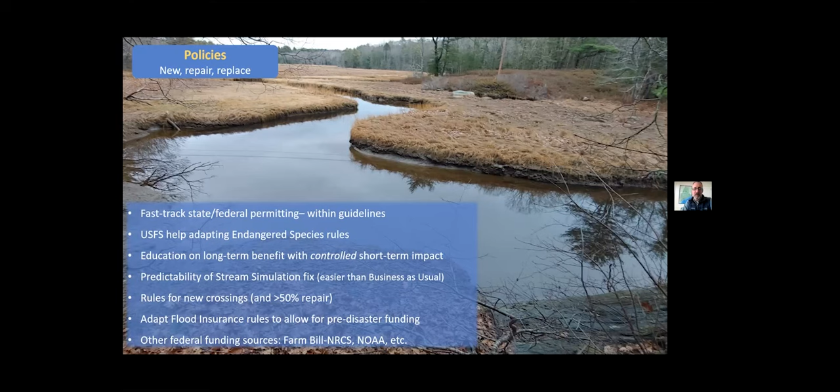Education and outreach is a crucial component. As we saw, a lot of people identified a lack of knowledge and understanding. We need to educate our regulators so they know what they're looking at when there's a problem. Our planners and state highway engineers particularly need education on what a stream should look like and what a stream crossing should allow. I think this needs to start in schools as well.

We haven't quite figured out how to get people like Bob Gubernick and Dan Cenderelli and others teaching smart road crossings in engineering schools, and coupling that with climate science so we understand how bad this problem can be in the future, as bigger and more severe storms and droughts in between affect our rivers and streams. And we need to network.

We do a lot of this through World Fish Migration Foundation events like World Fish Migration Day and the Sea to Source book. This is a way to get excitement out there, to inspire people and then connect them with the information. And then we need to implement projects.

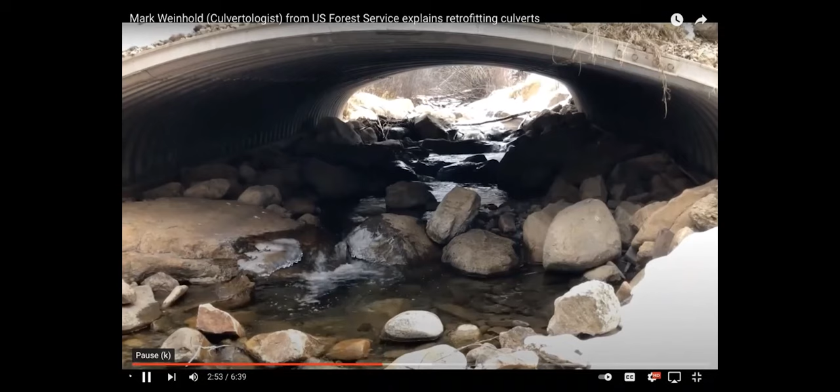So some of you are probably thinking, wow, that looks really good, just like a stream. How did you know how wide to build it, or how big those steps through there should be, or how big the bed material should be? Well, that's that whole reference reach idea. We don't claim to be the smartest people around, but we're pretty good at copying stuff, and that's exactly what we did.

The key features of channels in this environment with big bed material and steep gradients is the step pool sequence, and that's just how energy is dissipated. Each one of these steps has its own height, and it has a pool depth associated with that height, and a pool dimension as well, all things that we can measure and recreate inside our structure.

I finally thought of a benefit to being out here in the snow. That is how well it shows the actual width variability in these channels. And a channel at a certain gradient is not one single width. It varies whether you're in a pool, a riffle, or over the top of a step.

Notice the diversity of the bed material that makes up this channel. Everything from large boulders, transitioning to cobble, large gravel, and eventually in the margins you'll see a fair amount of sand and fine gravel, which is likely the bulk of the material that moves down this channel in any given year. But the mixture of all these materials is important to bring back into our design structure to make sure that the complexity is formed and the bed is actually sealed.

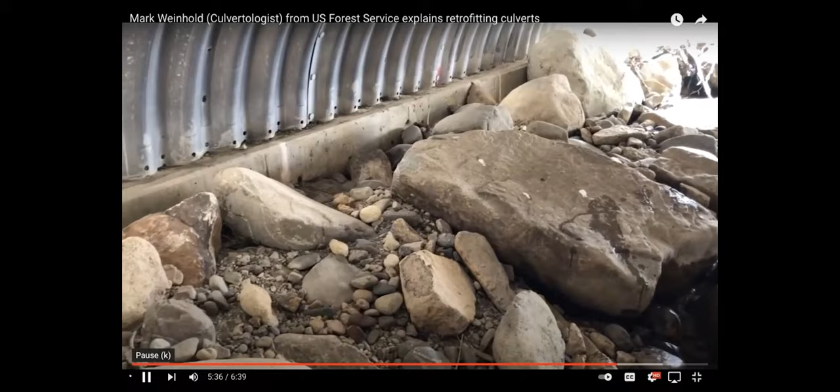As a general rule, we like having bank lines in the structure. This provides that diversity along the edges, keeps the stream from adopting one side of the channel, and protects your footing over the long run.

All right, now you have to quit imagining that you're a fish and imagine you're a small mammal or an amphibian. Wouldn't you much rather traverse along there than go over the top of this road and risk it and run over? I think I would.

Well, I can't think of any more questions that you might want to ask me, so I may just have to wrap it up and be content with looking forward to the day where we get to see each other in person again. All right, have a great day.

Well, that was simply great. I think that we're going to give the questions for the discussion session as we need to move forward. Is that right, Herman? There's somebody working on an excavator. Sorry? There's an excavator in the webinar. It's me. Unmute. Yes, so I was muted. Fantastic. Well, what I was saying, if you were not listening, is that if there are questions, we will address them by the end of the webinar when we have the discussion session.

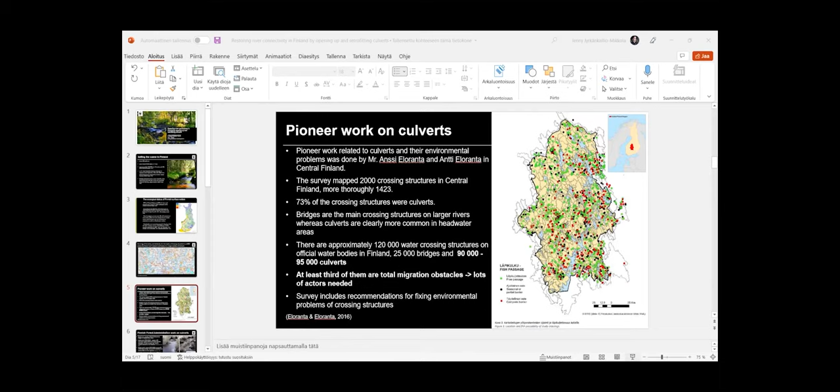Thank you so much. Can you hear me well? Yes, we can hear you very well. Now for the exciting part of sharing my presentation. Let's see how this turns out. Can you see the full presentation now? No, we cannot see it in full. We can see your presentation, but we see all the slides, so you will have to put it in presentation mode. Let's try again. How about now? Let's see.

Perfect, okay great. Thank you to the organizers for inviting me to talk a bit about culvert issues in Finland. I will address the history of culvert issues, as well as the pioneer work related to that, current projects, and also the goals in my presentation.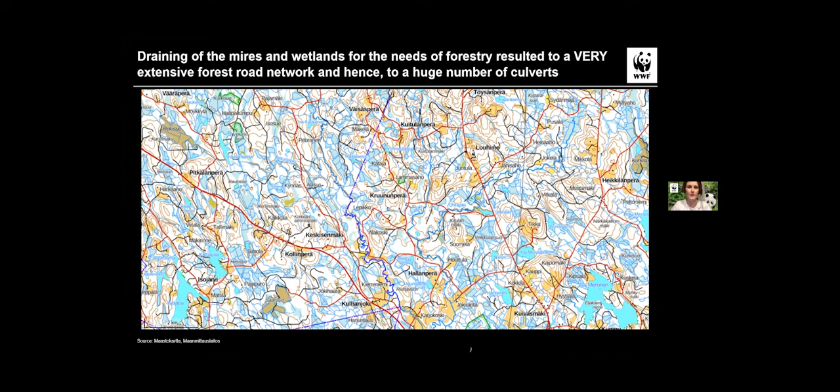So this is just to set the scenario of how many culverts we actually have even in Finland, especially on the headstream areas, as we've learned today: a huge number of culverts. The pioneer work on culvert issues in Finland started mainly by Mr. Anssi Eloranta. He, with Antti Eloranta, made a survey in the central Finland region where they actually mapped 2,000 crossing structures, more thoroughly a bit more than 1,400.

73% of the crossing structures turned out to be culverts. After doing this survey, they made an estimation at the whole country level that there are approximately 120,000 crossing structures in Finland, of which 90,000 to 95,000 are actually culverts, and more importantly, at least a third of them are total migration obstacles. This number tells me that a lot of actors are needed to actually improve this issue in Finland as well.

The central Finland region is now more thoroughly mapped, but obviously we have all the other regions which are not as thoroughly mapped as central Finland. Another very important work has been done by the Finnish Forest Administration, a state-owned enterprise that takes care of state-owned forests and conservation areas. They had a couple of Esteet Pois projects in the Oulujoki River Basin, where they mapped the migration obstacles more thoroughly.

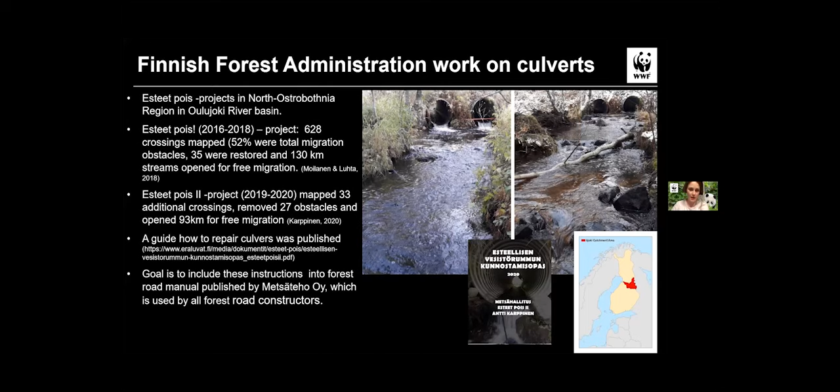After that, a second Esteet Pois project continued the work, removed more obstacles, and prepared a guide on how to repair culverts. The very important issue would be to get these instructions into the Forest Road Manual, published by Metsäteho and used by all forest road constructors. This is still in progress, but it's a good way to spread the knowledge on how to decrease the problems caused by culverts.

A little bit about the money in Esteet Pois projects: on average, the cost of one site was a bit more than 1,000 euros. 35 tons of stone material were used for restoration, and it took about 6 excavator working hours. The Finnish Forest Administration has removed altogether 207 obstacles and opened 514 kilometers for free migration between 2016 and 2021.

We as an organization have not just sat silent on this issue. Our work related to migration obstacles started with a project focused on culverts, and now, three years later, we are removing larger dams, even active hydropower dams, and general and political views have changed towards free flowing rivers. It's really exciting to see the progress in Finland; we have a good thing going on here.

We did a lot of advocacy work related to the Private Roads Act and its legislation. Getting an addition into the act was a really good win: if you get subsidies for road maintenance, you need to reconsider fish passages and fish migration as well. That was a really big win.

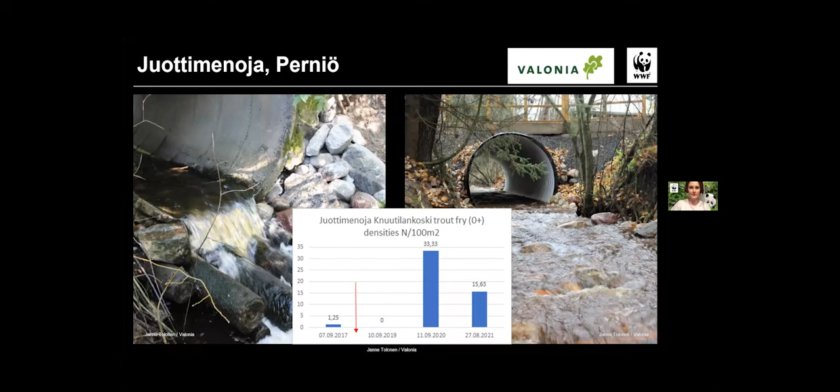The last example is Ylösjoki Hollola, where we worked together with a large retailer on K-Fish Ways, part of the Mating Belongs to All project, doing stream restorations and also culvert work. So this is just to say, in many cases these sites are worked on in cooperation with other actors, landowners, and water protection associations and so forth.

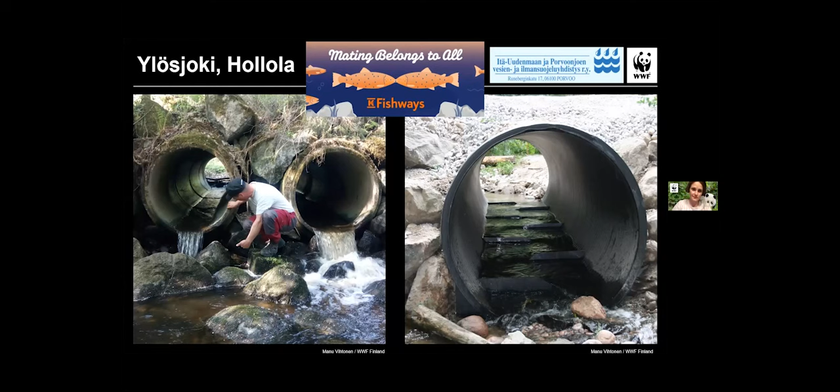Obviously, at the same time as we remove the culvert or restore the river, we also add spawning grounds. It's really, really cost beneficial to do that, so we have proceeded in this way at many sites.

A really important program in Finland is the Helmi program, led by the Ministry of the Environment, which aims to strengthen Finland's biodiversity and safeguard vital ecosystem services. The goals related to culverts are to restore 200 kilometers of small water bodies in conservation areas, with measures including removal of culverts, and to restore migration possibilities to 700 small water bodies on private land outside conservation areas, also removing culverts there. There's also a high target to remove 970 migration obstacles from state-owned areas, which is the responsibility of the Finnish Forest Administration. So we have really good progress going on in Finland, I would say.

Threats, opportunities, and to-dos. As we've learned today, climate change poses a challenge for culvert issues as well. They might harm them, and when they need to be replaced, it would be really crucial to replace them in a way that doesn't cause any more harmful effects. In the near future, we have increasing needs to renew our forest roads and private roads, and this is a very crucial step forward to make a change there.

I think Carlos showed it very eloquently how big a problem, how many there are here. And there have been a lot of good projects - I really commend, Sophia said it, Jenny said it, Joshua said it, everybody has said it, there's a lot of good things going on. But the problem is of such a massive scale. So how come that something that essentially had solutions ready two generations ago, why is it that we're still here battling this massive problem?

I think I'll put to you that that has something to do with shifting baselines, or what you call environmental generational amnesia, EGA. Essentially the bottom line is that each generation starts out and experiences nature, including rivers and stuff, as kids. You maintain that view as a baseline of what nature is. When nature then deteriorates in your timeline, you forget, and new generations grow up experiencing a deteriorated nature, and that cycle repeats. Once all our old farts - Joshua, Herman, Carlos, me and stuff - are at some point retired, how do we maintain all the stuff we're talking about here? There is a generational gap. You have to transfer that into the new generations, the younger people here in the audience who have to carry this torch on.

Just to give you a concept here - I don't propose to be as old as this guy, but he has a Netflix series, David Attenborough, by the way, for those who don't know him, called A Life on Our Planet or something like that. And I encourage you to see it, because in that you can see also that deterioration in nature that he has experienced in his lifetime. So keep that in the back of your mind when you're working with this, when you're trying to make this bigger, when you're trying to make this very, very good. Educate the kids, educate the younger generations, make sure that this is a legacy that stays on.

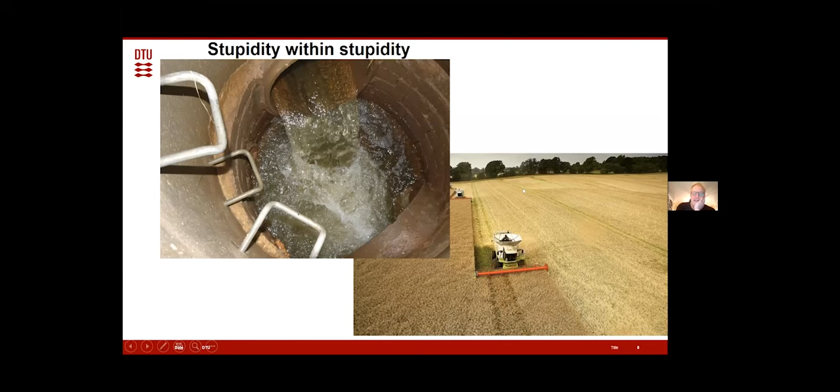The other thing we are challenged about is that things change, politicians change, political change happens. Just a few years ago, we had a minister of fisheries in Denmark, and there was some debate at some point. His argument was, well, there's a lot of nature in cornfields, so that's why I put the cornfield in. If that's the perception of what nature is, we're at odds. The people who've been out there experiencing it know that's of course not the case, but there are actually people thinking that way.

He got sacked, by the way, because he did some phony things about the fisheries, so he got kicked out. Now he works at a prestigious environmental institute in the US, making environmental analysis, just for your reference.

So what is the takeaway here from what we've done in Denmark? I think that fits into everything else we see in this context. There are some simple ground rules you should follow, some simple guidelines. You should aim higher. You need to avoid these passage problems from the aquatic organisms, and I'm talking in the broader sense from the beginning. I know fish is very important, but there are more things out there.

There are lots of things we don't know anything about, and we can investigate ourselves to death and still never grasp the full concept of the connections out there. So avoid the problems from the beginning. Number one: do not change the original gradient of the river, period.

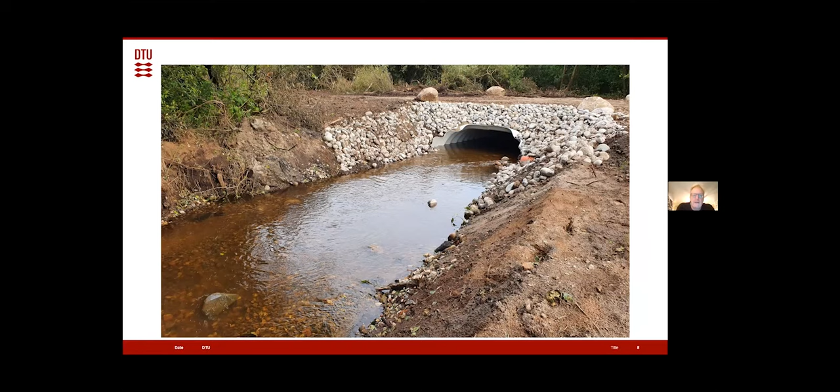If you don't change the gradient, you should be safe in terms of this. There's a smaller one here, and you can see how it looks when it's put in, that it will be able to take all the water. This one is actually slightly smaller than I would prefer, but at least it's a way to go—I would prefer you go this way. Here you have made it significantly larger, so it can take all these flood events, and you use the opportunity to put in a bike path so people can come out and see the nature.

You can also just leave it for the original sediment, depending on what you want. This is in a rural area. And then finally, just one more thing in terms of making it big enough. This is a YouTube video you can watch later.

That's actually from a US guy who removes beaver barriers that they make on the culverts. It's pretty funny seeing him take down these beaver dams. I put this picture in where he films through the pipe, removes the beaver dams, and one hour later he comes back, and that's how it looks.

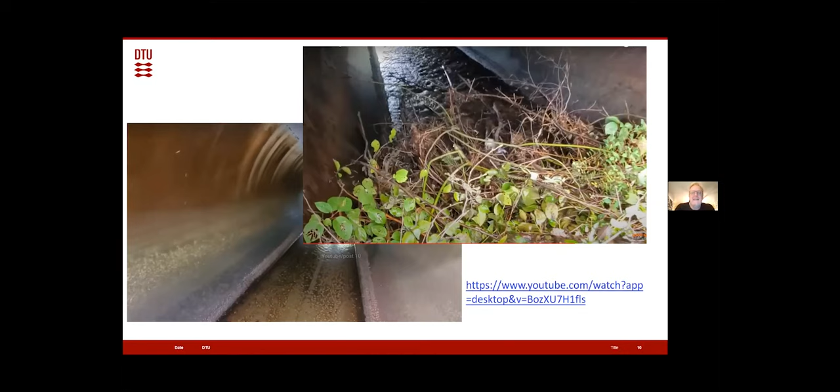So I'm telling you, especially you UK guys, because I know beaver is really hot over there, just be aware that you have to make them big enough for the beavers. Otherwise, if you make it too small, you're going to have to come back again and again to remove them if you want to maintain your roads. So as I said, here in Denmark, when we end up and cannot do anything about it, we do that.

We essentially put in rough substrate and mimic what happens in the stream itself. So we lift, so there's actually access. You can see it before and after. You can see now there's sediment inside the pipe. You can see the water level is lifted. It's also over a gradient so that it's passable for aquatic organisms. We do the same on the upper end if necessary.

One more thing I'd like to engage is that we do a lot here on a smaller scale where we engage locals, typically anglers or people interested in nature. You come out and make this project. Essentially, there is a lot of will by engaged people out there who will help you do this, and essentially all you have to pay for is the gravel. They'll come in their own free time and help you do it.

This is a part where you can see the pipe in the background, and people are now aligning this drop here over a longer stretch so that it's fully passable. You can see how happy they look. This essentially is how it looks after it's made, and you can see it's also habitat adapted to this lowland stream. This is actually a spawning place for sea trout and salmon at the moment.

So I will encourage you to engage people, both to make sure you have this legacy, that there will be people of different ages who know what a good solution is. If you engage the locals, they also will be able to affect, or at least push politicians and decision makers to make sure this is something important, and ensure they will spread that message to other people. So use locals and engage people to spread the message and make this a bigger movement, sort of like Herman is doing with this organization, Fish Migration.

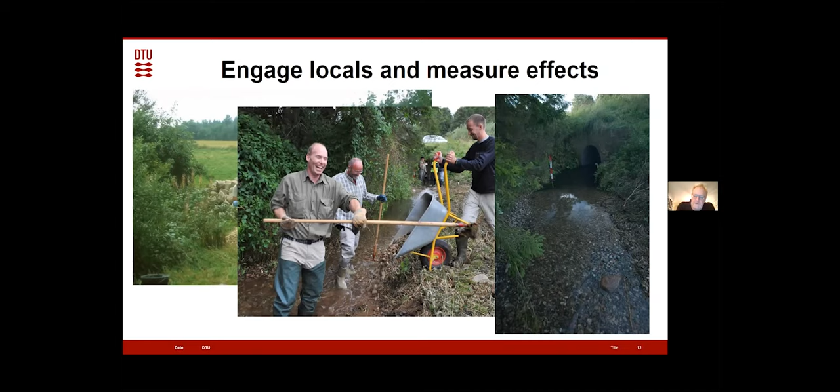So how do we make this bigger, business as usual? Again, bottom line: aim higher, make it correct and long lasting the first time, which typically means you have to make them bigger. I think we cannot get around that we need stronger legislation. I'm only familiar with a few countries' legislation, and I know lots of countries have things like forestry laws in Finland. If you put in legislation saying you cannot make a new road construction without a culvert that has been approved by some form of expert, I think you will solve a lot of the problems, at least over time, because it is of a massive scale what we're talking about.

As I said, engage locals. One thing I haven't touched much upon, but it's been shown in other presentations, measure the effect. We've seen it on trout and salmon, and publish it. That will ensure it is somewhat time resistant, meaning people can revert to it. Don't let it sit on your disk, get it out there. It's not enough to have a lecture somewhere or talk to local municipalities. You need to get it out in a format where people can approach it. That should ensure the legacy if you do what I've suggested here.

In that sense, I think we're on a path to finally getting the upper hand of this culvert issue that should have been, in my opinion, fixed long ago. So go out there and make the world a better place, culvert by culvert. Thank you for listening.